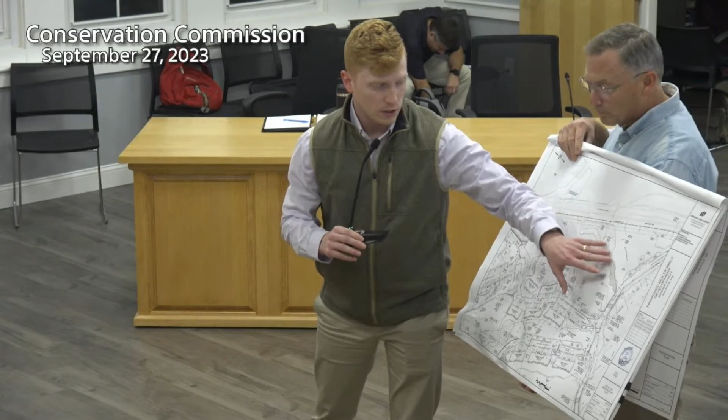Again, the groupings are clustered together per the replication requirements, and those are detailed in the detail sheets, towards the back of the packet. What sheet are you going to talk? So it's going to go to C64. It's the sheet which details these replication areas, showing that we have the replication areas of 1.5 to 1, same as they were before, but they're just grouped together instead of separated out on either side of the crossing. So that should cover the replication areas, and hopefully that satisfies what we were discussing in the last meeting.

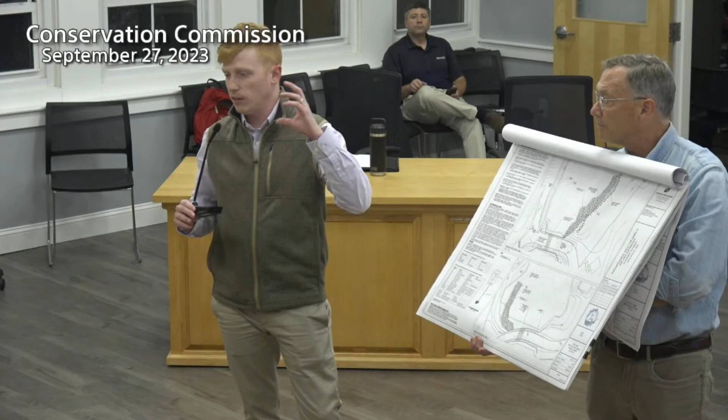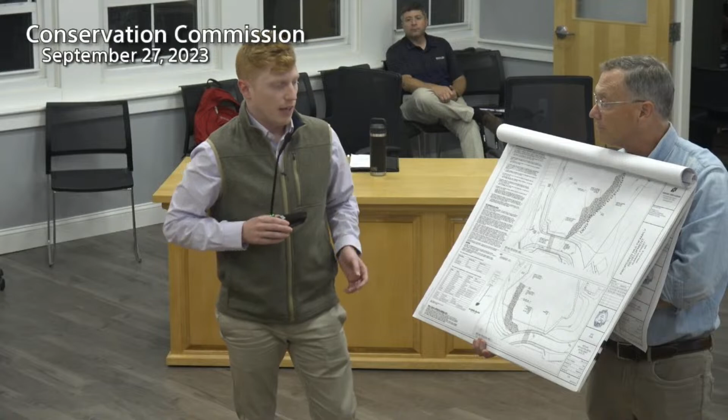Other than that, we had a comment from the Tetra Tech peer review, which was still asking to maintain that 6 inches of storage prior to spilling over from the isolator row. So instead of having an elevated manifold, we went to a weir control and gained that 6 inches exactly on every single StormTech. It's just a different orientation of how StormTech does their manifolds, a weir control with a bottom manifold. Again, maintaining that 6 inches of storage for the first flush and the water quality volume. And as Carl's letter states, he's reviewed that and he's comfortable. And those are on the sheets.

Starting on C58, and it'll be 58, 59, 60, and 61, I believe, because it's 4 in a row. And you can see the elevations that are detailed in the system details, and that's for each one, and all the information is listed on the plan there.

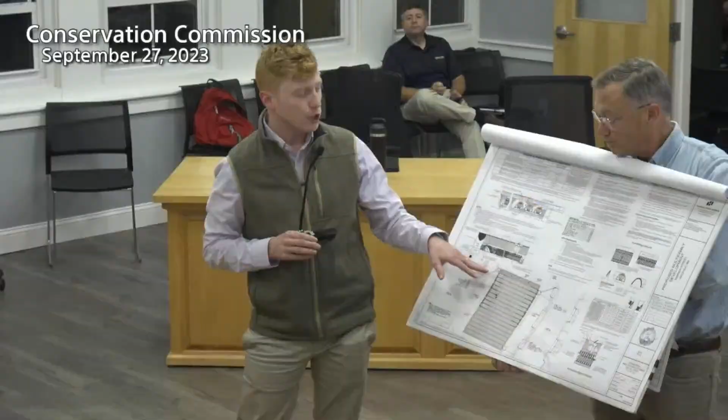So Patrick, just to describe it a little bit better, the issue that was brought up was with the isolator row, which is basically a pre-treatment system, and that's how you get your TSS, meeting your stormwater requirements. It's basically a first flush. When you have that first storm that comes in, it diverts into this.

The chamber is lined with additional fabric to capture that sediment, prior to the weir overflowing into the rest of the manifold, which will then capture the overflow volumes for your larger storms, your 10, your 25, your 50, your 100 year, and then that's all outlet controlled through the rest of the StormTech infiltration system.

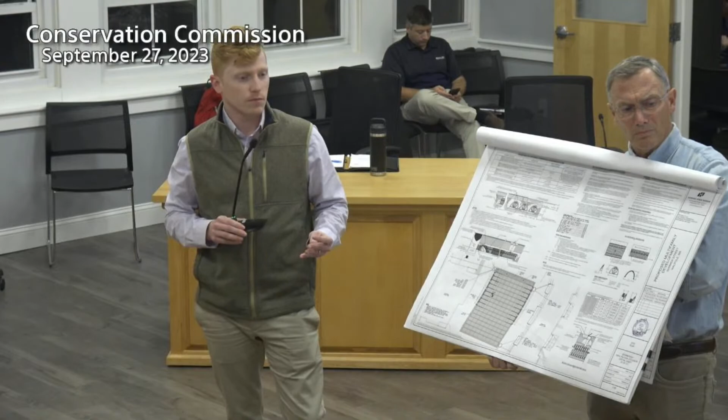With the elevation, so that there was enough space for sediments that went in, that there wouldn't be any greater than 50% sediments, which is a requirement of the stormwater standards. Yeah, basically that's a good explanation. So all that has been satisfied on these plans, and that's shown and detailed for every single system that we have on the site.

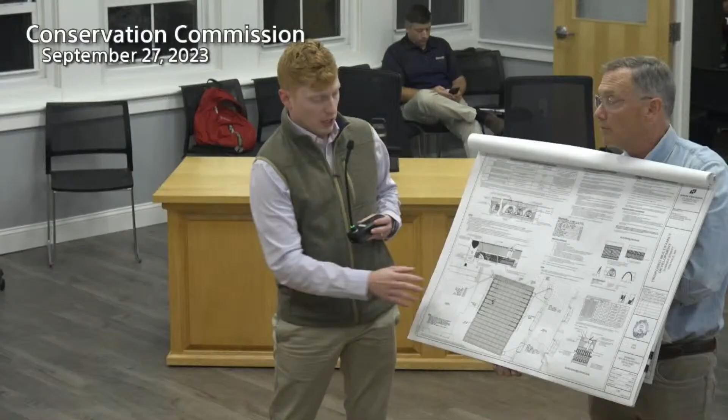Excuse me, is it shown in the drawing where these are located? So these are kind of the blow-up views. The other packet, which I believe each of you have, that's going to be this one. They're shown throughout the grading and drainage plans, I think C19 to 24, as well as outlined within all the layout materials plans. There are several different sheets where you can see them all throughout the plans.

Okay. So just to clarify, in the amendment, there is a new infiltration basin. And then the infiltration units, did you redesign one under the amendment, or was it just brought up because the peer review looked at the whole site to some extent? So the adjustment was strictly a construction detail. The footprint of all the existing ones not subject to the modification was just adjustments to manifolds or weir controlled inlets and stuff like that. So the footprint has remained the same.

Whereas the proposed ones, we had a couple adjustments to the infiltration rate per some agreements that the peer reviewer and I had as far as maintaining the infiltration rates for the soils, which we went over in the last meeting, and then the inlet control was weir controlled, and that's been put for all the Storm Techs. But for the amendment, it's really only an additional new infiltration basin. Yeah, it's the infiltration basin, and then you have the 2 Storm Techs for the Lot 2 building.

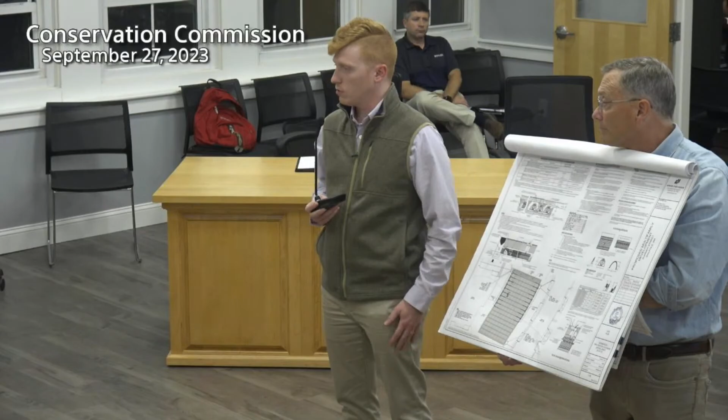What's the longevity of that geotextile? I don't have that off the top of my head, but it should meet or exceed the life of the system; these are not designed to be uprooted and replaced. Okay. Medio?

I'm looking at C12, I see the StormTech systems. Are these the locations we're referring to? Yes, so these are the blow-ups of those. 1, yep. 2, 3, 4, okay. All right. In the replication areas, what is the ratio, is it 1.5 to? 1.5 to 1. Yep. Okay, that's all I've got.

Al? Okay, so now, we have inspection ports, but according to this drawing, it looks like they're tiny. What's the size of that? Can a guy go down in there, or what? So the inspection port is actually only a 6-inch port. You basically just open up the top and you look down. You can't even get a vac truck machine to get anything in a 6-inch hole. How are you gonna clean it through that hole?

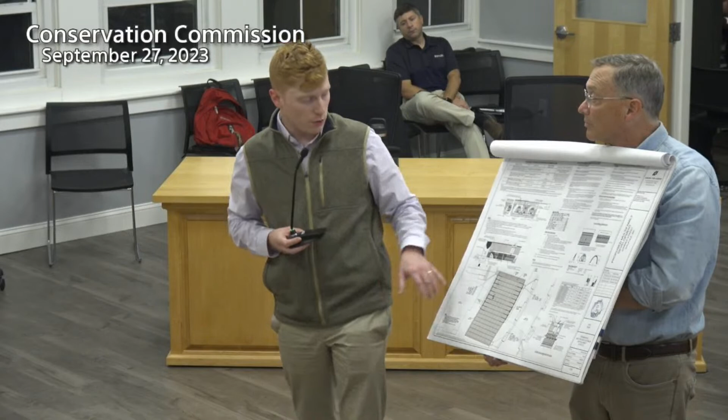You actually clean it through the manhole itself. So it's basically like a broom almost, and you put it in. So that whole length gets cleaned from that one manhole? Yes. Okay. So the inspection port is just to view how much sediment is in the system, and then it's reverse flushed from the manhole.

Now, I notice on some of these systems, there's a manhole at each end. How come there's no manhole at both ends on this one that you have up there? Because you don't want this to go into the rest of the system. This is to trap the sediment. It's double lined with fabric. The water will be able to go into the rest of the system, but the sediment will be trapped in. It's got an end cap at the end, whereas these have manifolds on both sides if you have a dual inlet, and then it will be able to flow freely throughout the whole system.

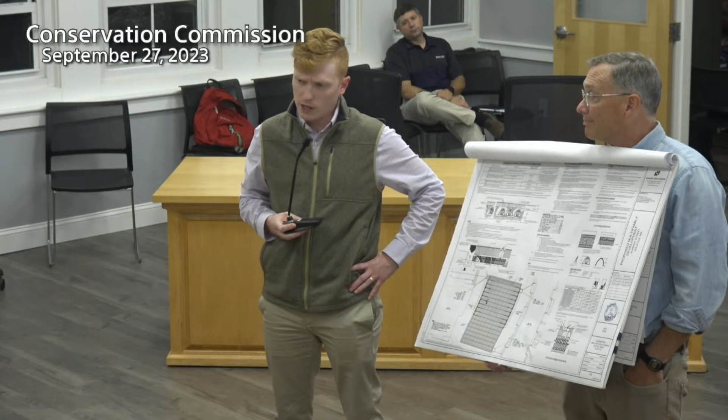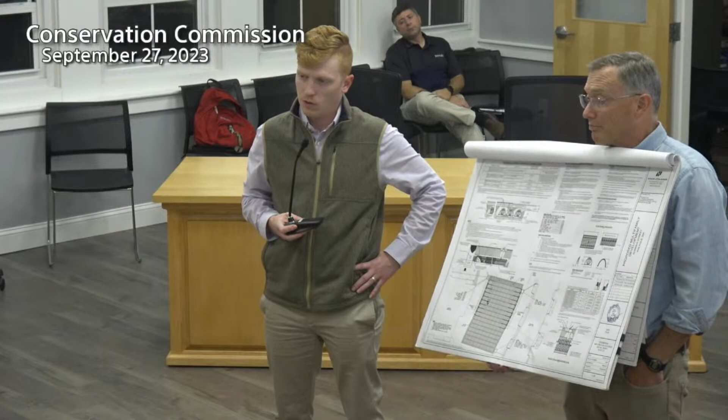And do you remember how often somebody is supposed to look in those inspection ports? I believe our schedule says twice a year for maintenance. And if it builds up to 3 inches, you say, then they have to clean it out? Yep. Okay. Because I don't have much faith in the fabric staying open very long. My experience has been that fabric clogs up pretty fast. So I would expect that if they don't sweep the areas often, there'll be a lot of sediment get into that isolator row and need to be cleaned often. Okay. That's all I have, Jack.

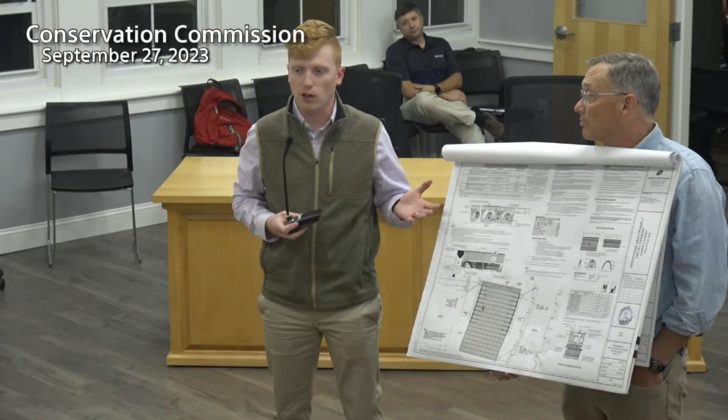That's it? Well, I thought Doug was gonna ask, so what's the life of the system? Well, I kind of wondered that. Okay, well, let's ask. Yeah, that's a good question. This is designed to exceed the life of the development. What's the life of a development? What do you guys think of, I mean, life of a development? I live in a house that was built in 1875, in a neighborhood that was established then, so what do you think the life of a development is? Not that it's our jurisdiction, don't worry. No, I would think probably well over 100 years. 100 years.

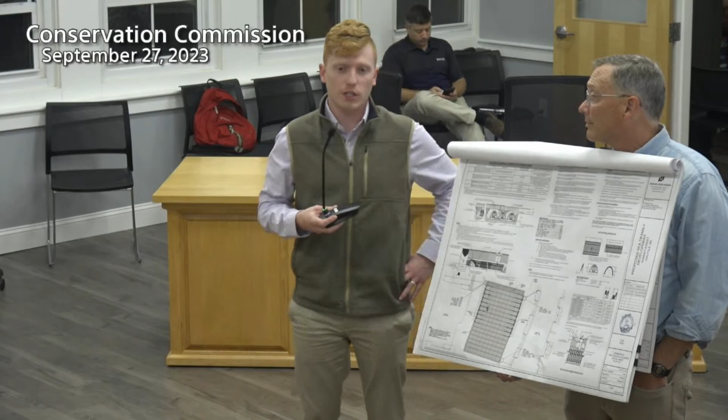As part of the operation and maintenance manual, if that does need replacement, it's covered, that's the owner's responsibility to replace it. Is there anything specific in the O&M manual that would cover things like this that are long-term? I don't know what else they would do. It would probably be under a manufacturer's. I'm not sure on a manufacturer's warranty or anything like that, but we'd have 75 years on the website. 75 years on ADS's website.

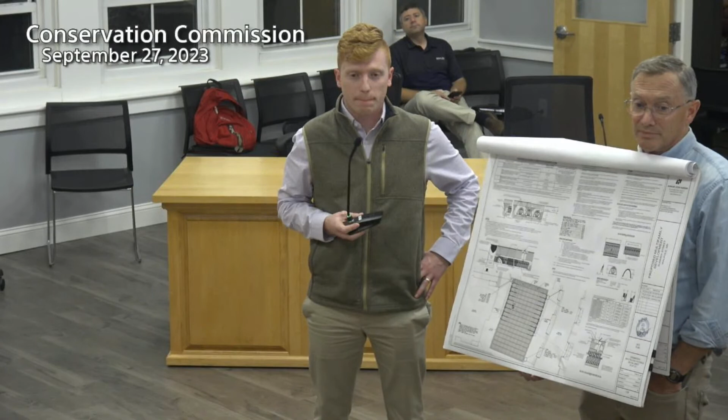But the development would be longer in existence than that, I would think, so then when it's replaced, it's then the current owner's responsibility, since there won't be a homeowners association with this, is that correct? No, there will be no association, because it's just an apartment complex, so there's just a single owner. Okay. So whoever is the owner at the time, it's their responsibility, right, and these things are all over the place. This is really not a particularly new design.

And we do always write in the conditions that they're required to maintain the stormwater management system. I'm not sure if we always continue that, but we continue it, and if it clogs up with sediment and starts backing up, it's gonna cause a problem, so it needs to be repaired. I think that would be covered from that. A question on this, anything else?

No, Betsy? That's it. On your drawing, sheet C58, it says on your detail that there's an optional inspection port. I assume that the piece above the cross-section of the, whatever we're calling this, the isolator, it says optional inspection port.

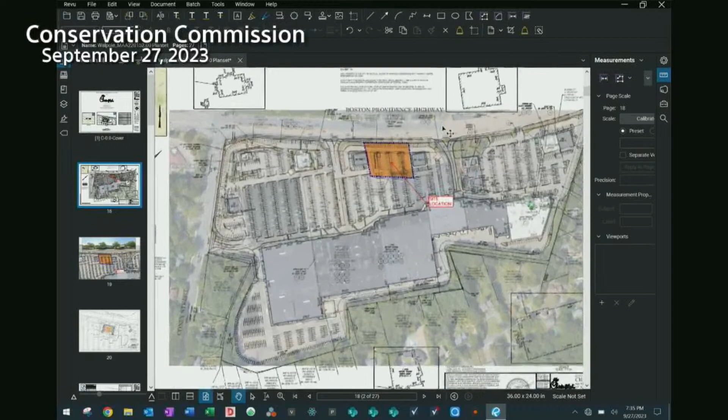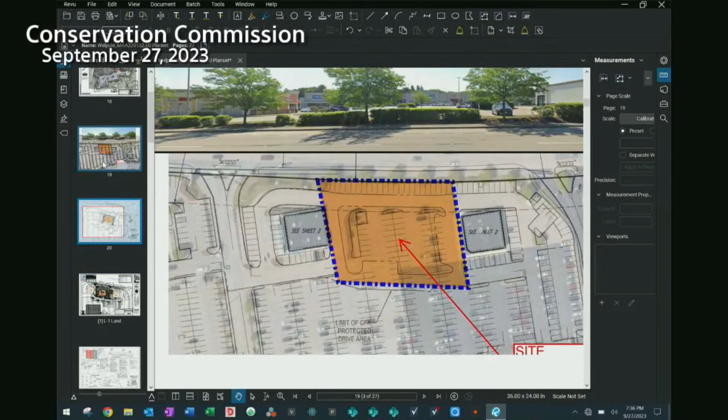With that approval came some drainage modifications to the site. This portion of the parking area in here, there's a large subsurface, I think they're all 36-inch perforated ADS pipe that's located underneath that parking area. It's a pretty large system that's basically located within this parking area. And there's other systems beyond it, but this one was impacted by, obviously, the Chick-fil-A development in 2018.

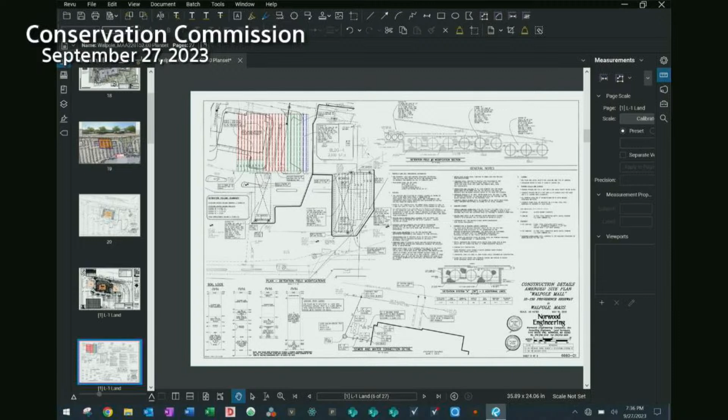At the time, Norwood Engineering did the site plans for this development, and had prepared a plan that was approved, and this is gonna be a little bit confusing, there's a lot going on here. But this was a plan that was submitted by Norwood Engineering with the full submittal package that was approved, that detailed out the areas of the system that were going to be removed and where they were being relocated to on site to replicate that volume that was being lost. So what I've done is highlighted this a little bit. I'm gonna zoom in just to make it a little bit clearer.

Hopefully you can see the colors. So as you can see, this is the layout that I just showed you. So the building is situated here. I'm just kind of outlining it with my mouse. And you can kind of see where this large drainage system is located underneath that parking area.

So per the 2018 approval, in red are the drain lines that were going to be removed. Basically, they're being removed underneath the building areas, underneath the drive-through areas, just anywhere that might require maintenance. And Chick-fil-A was concerned that if there was any maintenance being performed, obviously the building, there couldn't be anything underneath it, but in the drive-through, it would impact their drive-through operation. So in red were the pipes that were going to be removed and relocated.

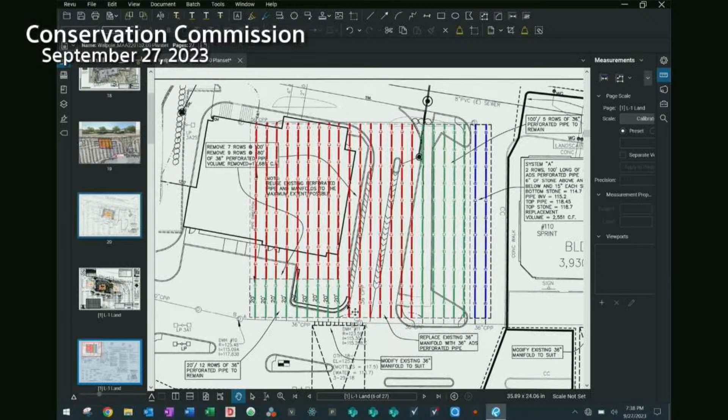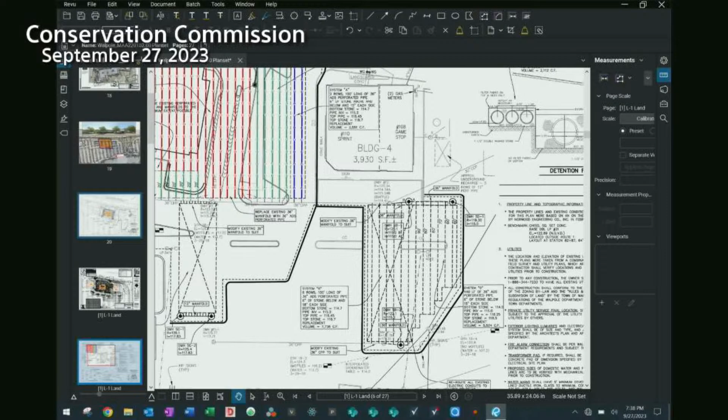I'll get to that. In green were the pipes that were going to remain. So part of the development, a portion of the site, the pipes were to remain as they exist on site today. And Norwood had already coordinated with engineering and with the town staff as well to locate areas within the parking area through soil testing where they could relocate all that volume to. So again, this plan was already previously prepared. It was approved, and it dealt with the relocation of that volume that was being displaced just due to this development.

So fast forward 5 years, Chick-fil-A has now looked at this location, and since 2018, there's been many changes with the Chick-fil-A prototype. A lot of it came from COVID. Their drive-throughs were obviously very busy, like all drive-throughs were during that time, and they made some modifications to their drive-through operations to increase efficiency. So this plan, although it is similar to the prior approval, there are a few changes, which is mostly pertaining to the two-lane drive-through. So the previous had two-lane entrance to a single lane out.

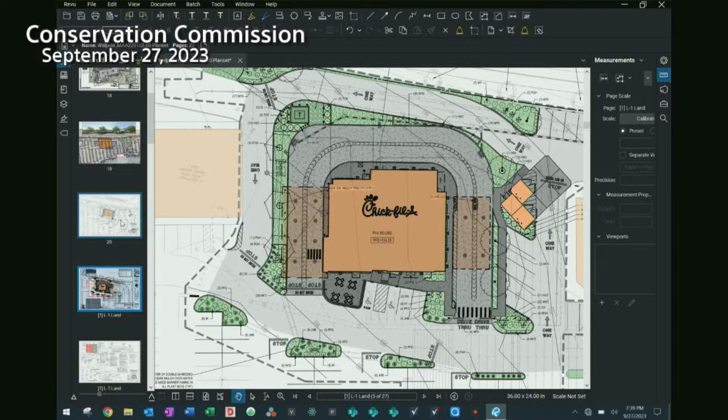Now with all Chick-fil-A new developments, they take what's called a 2-2 approach, which is two-lane entrance and a two-lane exit, and that allows them to take orders. I'm not sure if you've been to a Chick-fil-A, but there's team members out there during their peak times taking orders and delivering orders, so they're able to really increase the efficiency of the drive-through orders and really get customers through there quickly. And this facilitates that.

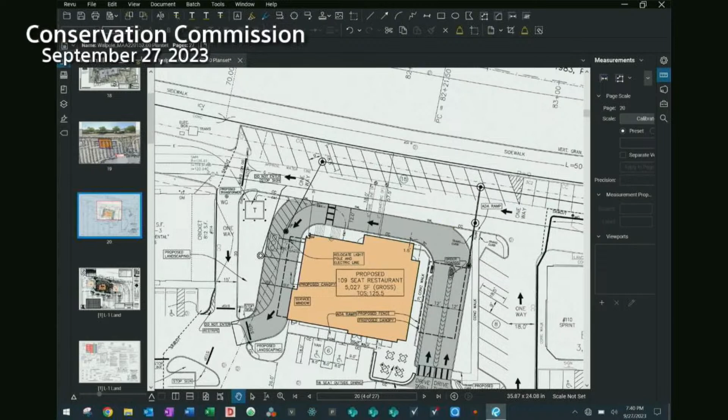So there are a few changes. Obviously, that second outside lane there is different from the prior approval. What that did was it pushed the one-way lane that was just north of the drive-through north, and it removes the parking that was along Route 1 previously. And I can flip back so you can see that difference. This is the prior layout. So again, there was angled parking, one-way drive aisle, and then the drive-through lane itself. And with the current layout, you've got that second lane expansion, so now we've removed that parking, and you still have the one-way flow there. So traffic flow is very similar to what the prior approval was.

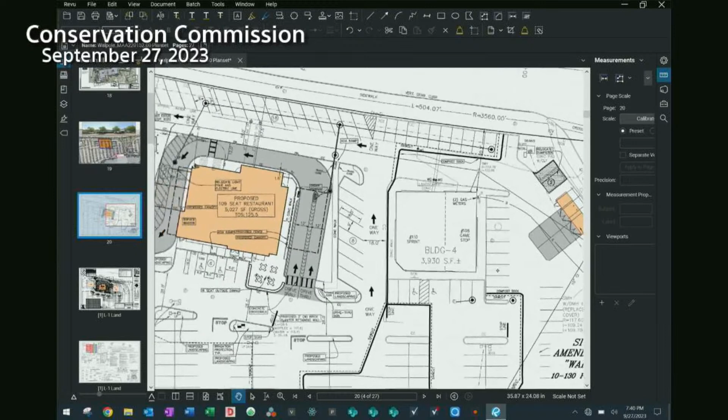The other change was the trash enclosure location. So under the previous approval, the trash enclosure was way off-site, which wasn't ideal, but it was the only location that, I think there were third-party approvals here that would allow the trash enclosure to be located. So now with the deal being renegotiated, they were able to get the trash enclosure closer to the building, which is much better for their team members to access for safety reasons. But what that did was it put that over a portion of that underground system. So really, the only change to the drainage system from the prior to this is relocating about 200 linear feet of piping.

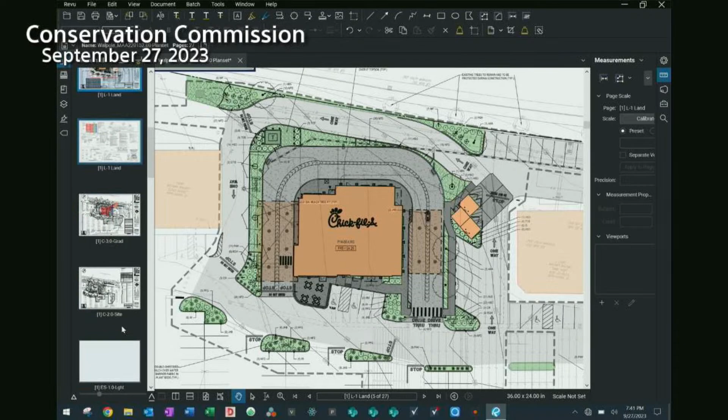And this kind of highlights that again. I know this is a little bit confusing, but wanted to try to color it up so it's a little bit easier to see. But again, this shows that previous graphic where the pipes were being removed. It's all the pipes that were going to be removed. It's similar to the prior layout, with the only difference being where this trash enclosure is here.

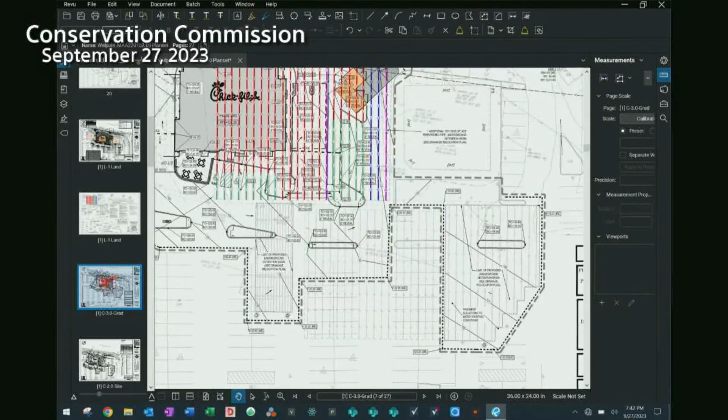These pipes would be removed, and in place of that, we're adding an additional 100-foot, 36-inch line, and then this line in here along the drive-through that was previously going to be removed, we're going to keep that in place. So the 200 feet that was being removed within this trash enclosure is being put back. So we're not losing any volume within that system. And the rest of the improvements that are off-site that were previously approved by Nord Engineering, all of that remains intact. So the volumes all remain per the old approval.

So in summary, it's a similar development. The drainage modifications that were previously approved, all of that is going to carry forward with this application. And as a bonus, this increases the landscaped area by about 1,300 square feet versus the prior layout. So in total, I think we're gaining about 7,000 square feet of additional pervious.

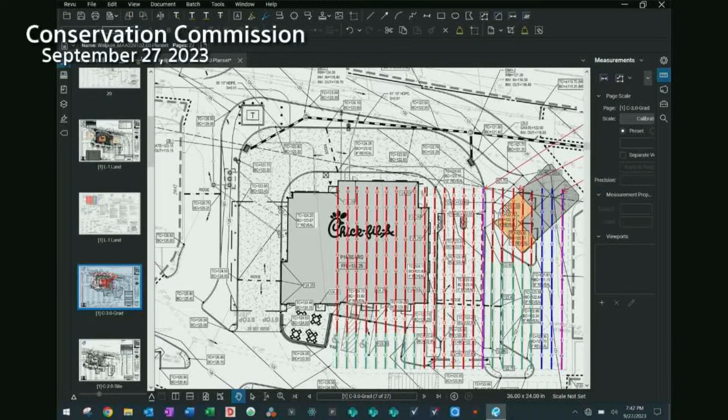So we're removing all that surface along with modifying the system. So the drainage system will still remain and operate as it is today, albeit just in separate locations. So that's just kind of quick, high level. I know that these graphics might be a little confusing, but we tried to make it as clear as possible. Good, thank you. Landis, anything you want to add?

Yeah, the only thing I would add is you keep on saying previously approved. So when you say previously approved, it went through site plan review. Correct. So I don't remember it going through ConCom. No, I don't think it did. I don't believe so. Nord Engineering at the time did that, and they sent us all their approvals, and we needed all that for the building permit application. ConCom wasn't part of that.

Right, but when it first went in 2007, when they put the pads in for the buildings up front, Panda Express and all those other buildings, that's when it went through ConCom. They did a redevelopment of the stormwater system. They put in those pads. They filled in some of the wetlands next to the Panda Express. They did a replication area. And because of all that, and the stormwater discharging to that wetlands and then going under Route 1 and into the Traphole Brook, all of the stormwater and the redevelopment upgrade was all under that order of conditions.

So that's why I just wanted to make sure, and it sounds like the storage, the water quality components and the volume are all the same as it was back in 2007, so that's why I just wanted to have you come here and just go through that. Sure. Yeah, so it was all coordinated, and I believe Nord coordinated that with the city engineer as well, because there were test pits done out there just to make sure that they had the separation and everything.